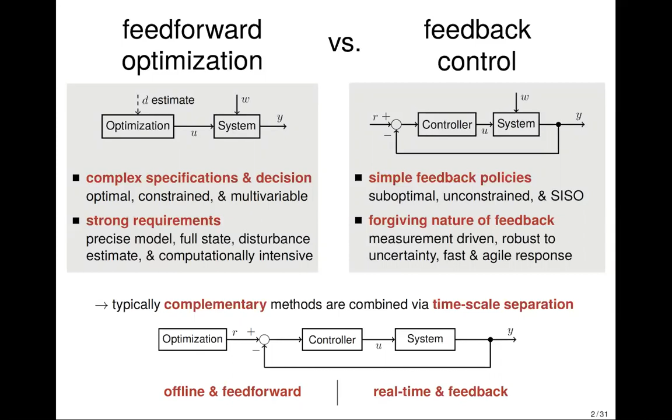Let me illustrate how this works out and some caveats on an example that I take from power systems, and I will use power system examples throughout this presentation. Namely, I use the power system balancing example. So the quintessential task for power systems is to balance load and generation. And if they're not balanced, so if there's more load than generation, what you see is an offset in the AC frequency of the system. In this case, it will be operating below the nominal 50 Hz frequency.

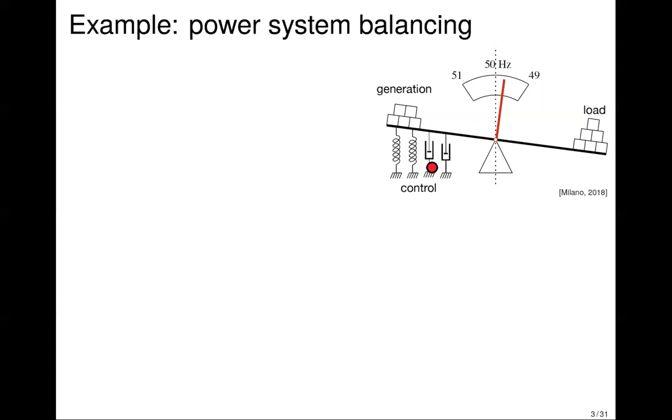The purpose of online control, indicated in this diagram by springs and dampers, is to rebalance the system based on frequency measurement. So we have these two decision layers. Offline, we dispatch generation based, of course, on prices of generation, but also based on forecasts of loads and renewables, which we don't know ahead of time. Online, we then have to mitigate any sort of uncertainty and fluctuation through feedback control, essentially some PI control based on frequency to rebalance the scale.

It turns out that in power systems, the separate offline and online decision layers are not enough. What we have to do on top of that is have a man in the middle. Essentially, we need to reschedule a set point every once in a while whenever the uncertainty was too large, our forecast errors were too large, and any sort of disturbances materialized, and the online controls cannot keep up with all of this fluctuation and uncertainty. In this case, you have to redispatch generation, activate reserve generation, or even shed load in the worst case.

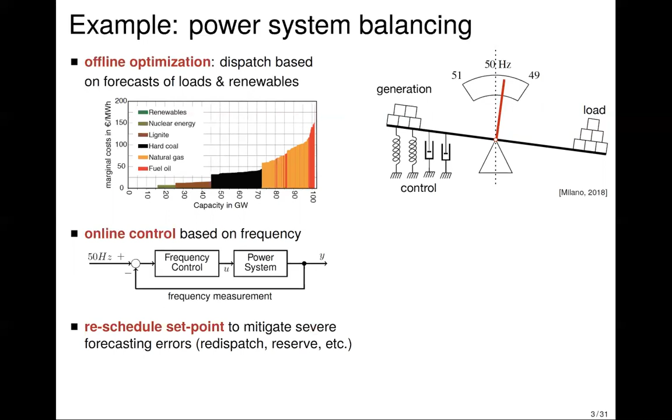As you can imagine, as we incorporate and integrate more and more renewables in the grid, we only see more uncertainty, more fluctuation, more disturbances, and thus probably more and more of these rescheduling actions. Let's take my home country, Germany, for example, where I plotted the data on how much these rescheduling actions cost in millions of euros. The costs are huge, as you can see, and they're more and more increasing as we increase renewables. Thus the conclusion we should draw is that this architecture of separating offline optimization and online feedback control becomes increasingly inefficient, and may even become infeasible as we have more and more uncertainty in generation.

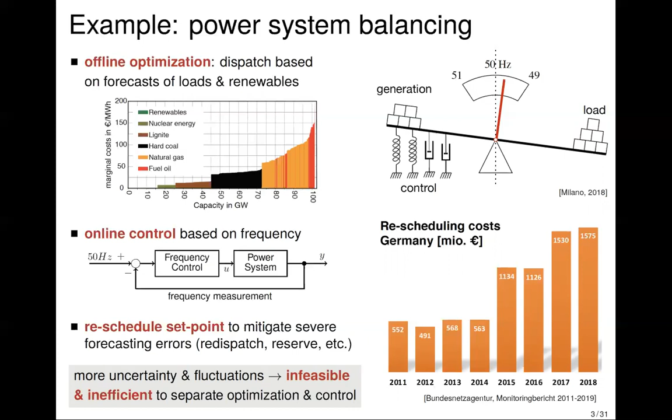This sort of conclusion can be found throughout power systems, not only for this balancing example, but also for other power system ancillary services. You typically have separate decision layers that all hit their limits under increasing uncertainty. Similar conclusions can be drawn, a similar case can be made for examples from process control systems or any sort of queuing, routing, infrastructure networks. In all of these examples, you typically have separate layers, and these layers hit their limits under increasing uncertainty and thus need some sort of cross-layer decision making.

Different architectures have been proposed in different communities. What I'd like to explore today is a particular type of block diagram, which is the following.

On the right-hand side here, you have the physical system driven by disturbances and control actions. And on the left-hand side, you have the controller.

I take now a particular controller, namely what I use is an optimization algorithm, but not a regular one. I use an open algorithm that has inputs and outputs, and online algorithms. So it's not a batch optimization, but it's recursive, can deal with streaming data. And I real-time interconnect this algorithm as a feedback control of the dynamical system.

In the simplest case, you may think about such an algorithm as just taking a gradient of an objective function that depends not only on the decision, but also on the measurements you take. So that's the open part of the algorithm. You real-time interconnect the algorithm to physics, possibly having some sort of saturation or projection effects here to take constraints into account.

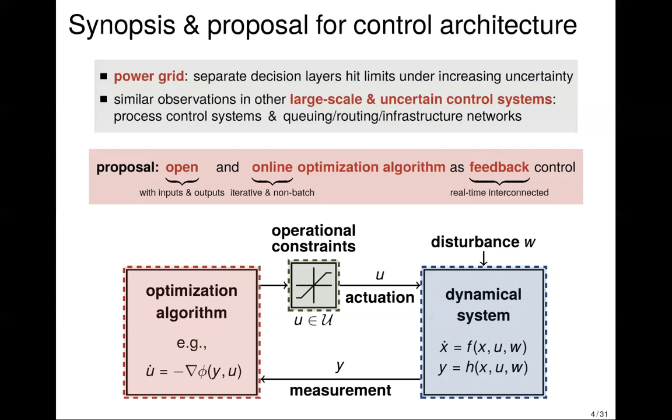Of course, this block diagram is not unique to us. There are many historical ancestors and variations of it that have been proposed. Maybe a historical root is in process control in the name of, say, self-optimizing control or modifier adaptation, where the purpose of solving sequential steady-state optimization problems was to reduce uncertainty in the system.

The block diagram directly appears in extremum seeking, with a minor difference that the algorithms that we use in extremum seeking are derivative-free, so they only rely on function evaluation, but they're hard to implement and generalize when you have high dimensions and any sort of constraints.

You can also think about what I've just shown you as a particular case of model predictive control, MPC, but of course without dynamic optimization in our case. On the other hand, we have MPC with anytime guarantees. That is, we have algorithms that we can stop at any point in time, such as real-time MPC or real-time iteration. So these are sort of conceptually related frameworks.

More closely related is the literature on communication networks, when around the turn of the millennium, people like Kelly, Low, or Srikant realized that you can inversely model the Internet Congestion Protocol, TCP/IP, as an online optimization algorithm. And then, of course, you can improve upon that using different optimization and control methods.

There's a lot of literature dating back quite some years on optimization algorithms as dynamical systems that has recently seen a revival in the context of the work by Laurent Lessard, Stephen Boyd, and Michael Jordan and their groups. And there's been also recent system theory approaches exploring this block diagram using output regulation and robust control methods.

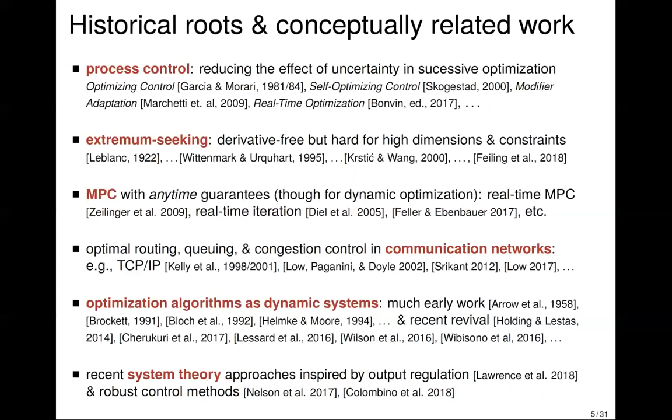Very closely related, I want to tell you today, is the literature that came from the power system community or from people that were performing control theoretic research, but inspired by power systems. Namely, the community realized very quickly that these open online optimization algorithms are great feedback controllers for power system applications. And that has sparked a whole lot of theoretic development.

Okay, so here's a recent survey by Molzahn and others. Here's my personal clustering of research groups involved in the topic. I'll let you guess the clustering criterion. An early adoption of these algorithms was due to Jokic in the name of KKT control for the purpose of power system balancing.

And around 2013, different groups in the US and Europe simultaneously started research on essentially distributed optimal integral controllers that would drive the power system to an optimal steady state. So early on, the focus has been on distributed algorithms, but rather simple models, whereas now the focus has shifted to centralized algorithms by more and more complex specification, complex methods, complex models.

These algorithms have seen different implementations in lab-scale microgrids, but also in large-scale transmission systems. For instance, a weakly related concept is transactive control.

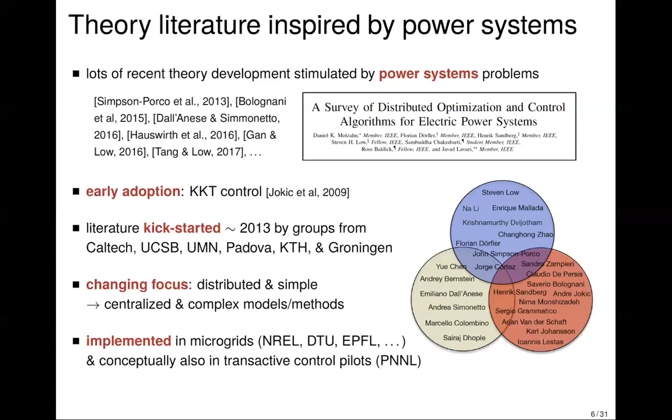So I would like to now explore this block diagram that I've just shown you today. In particular, what I'd like to understand today is, can we derive any sort of closed loop certificates, for instance, on stability or optimality? This will eventually lead us to studying projected gradient flows on manifolds. I want to discuss implementation aspects. And throughout the presentation, I will illustrate the theoretic developments with power system case studies.

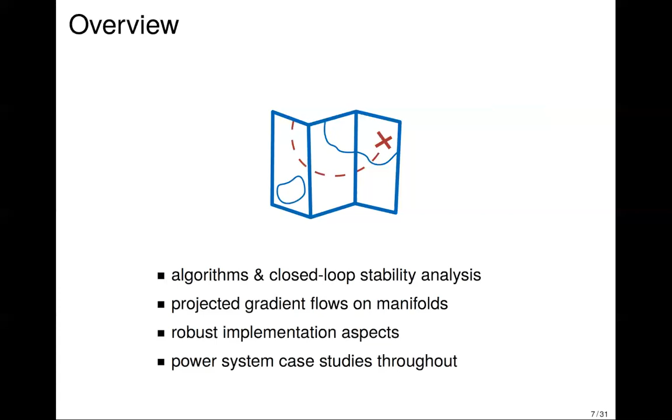Let's get started. Let's take a look at a simple algorithm and an optimization problem. So here's the optimization problem. It's an objective function phi depending on two variables, y and u, and we will later associate y and u

with the outputs and the inputs of a dynamical system. Certainly, outputs and inputs are related in steady state through the steady state map of the system. So you have y is equal to h of u for some function h.

So this constraint is explicit, and you have constraints on u. Say u is in calligraphic U, modeling, for instance, actuation constraints later on.

I'm now looking at simple algorithms to solve the optimization problem, continuous time algorithms. Why continuous time? Because I want to later interface this algorithm with continuous time physics. Of course, we have to discretize, sample-hold discretize algorithms in applications later.

The simplest continuous time algorithm is a projected gradient flow. That is, as long as you're in the interior of your feasible set, this gray region, you just follow this vector field, which is the gradient of the objective. Whenever you hit a constraint surface, you slide along tangentially and eventually get to a local optimizer down here.

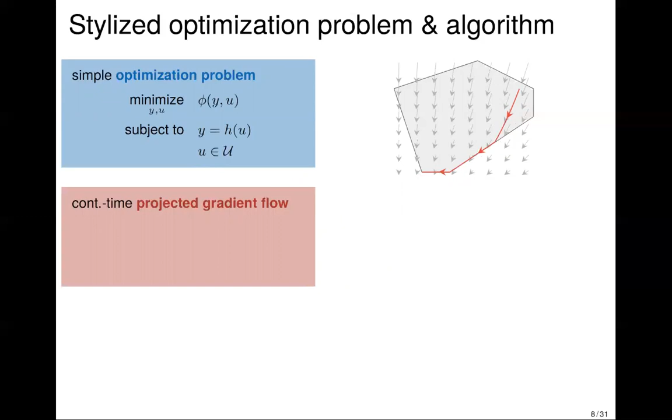So to formalize this very intuitive and simple picture, what you need is the notion of a projected dynamic system. So you don't have a differential equation x dot equals f of x, but now the vector field on the right-hand side of your differential equation is projected, and this projection pi is the following.

We look for the closest vector v to f of x within some feasible set. What's the feasible set? If you look down here, at this point it's the set of all feasible admissible directions, all directions that the vector field can take, where the solution can flow along, that will make you stay within the interior of that feasible set. So you find the closest feasible direction.

And you do this also typically with respect to a certain non-constant metric. So the ingredients here: we have some domain X in which we have to live, a vector field, a metric, and a tangent cone, which tells us the feasible directions. All of these have to be sufficiently regular for a solution to exist, and I will discuss this later on.

So now for the optimization side, what we look at is a projected gradient flow. So follow the gradient, already replaced here y by h of u, and we project on the feasible set whenever we encounter the boundary.

When you appeal to the chain rule, you can write this as dh/du, an identity, and here's the gradient of phi with respect to y and u. Then you have to do a point evaluation at y equals h of u at any point.

And you wonder, why do I write this simple gradient flow in such a complicated way? The reason being, if you replace this point evaluation by a measurement, a measurement y from a dynamic system, then now you have an open algorithm that you can interface with the system.

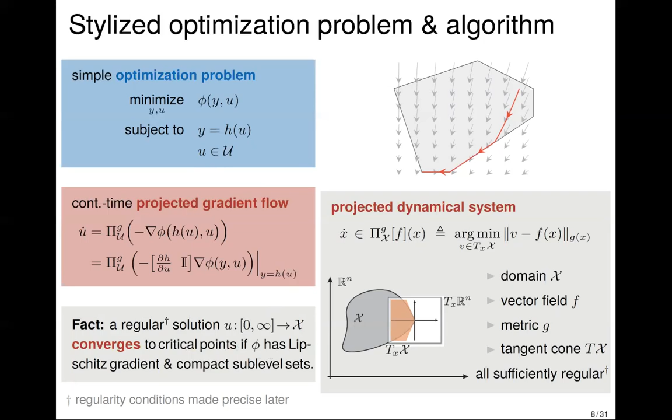Let us now interface such a projected gradient flow with the dynamic system. For now, let's stay within the simple world of LTI systems. So we have an LTI system with matrices A, B, C, and D. And we also include disturbances, Ew and Fw, on the process and the output.

Let's assume this dynamical system admits a steady state. So probably we need some stability assumption. We need the disturbance to become asymptotically constant. Then this steady state can be written as follows.

You can solve for x as minus A inverse B u and minus A inverse E w. So this will be the map His from the input to the state, and this will map from the disturbance to the state. And same for the output, where Hio will be the steady state input-output map, and the same for the disturbance.

We now want to formulate an optimization problem on the steady state of this dynamic system. So the optimization problem will be formulated on the sets of inputs and outputs that are related through the steady state map. And we have constraints U, so U has been a calligraphic U set.

Now we'll use that simple projected gradient flow to drive us to an optimizer, with the difference being now that I use an open gradient flow. That is, instead of using a point evaluation, y equals h of u, I replace this by a measurement. So here's the block diagram: I have my ABCD LTI system with disturbances, here my projected gradient flow, and now I real-time interconnect the two. I also use a scaled gradient flow, giving myself a gain epsilon, or in optimization language, a step size. The purpose of that gain is to reduce the input-output gain of this algorithm, or to enforce a timescale separation between these two systems.

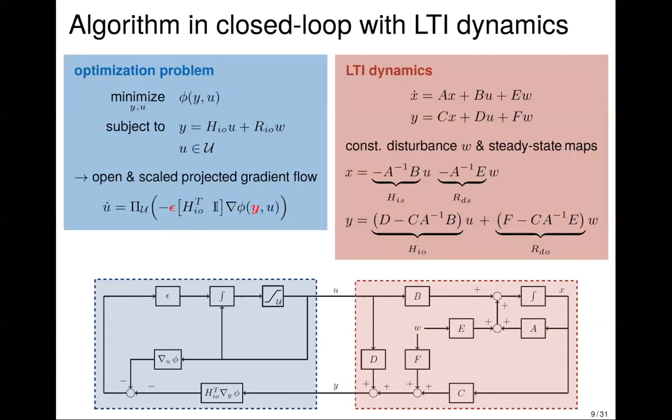We need the following assumptions. We need that the gradient flow in isolation is well posed, so we have compact sublevel sets and a Lipschitz gradient with Lipschitz constant L. We need the LTI system to be asymptotically stable with convergence rate tau, that is, there exists a Lyapunov matrix that satisfies the Lyapunov equation, P A plus A transpose P less than or equal to minus 2 tau P.

And we need a sufficient timescale separation, some sort of small gain separation between the two systems, that is, our epsilon should be small. It should be smaller than some value epsilon star, which depends on the convergence rate and input-output gains of the algorithm and the LTI system. So it's 2 times the exponential decay rate scaled by the condition number of the Lyapunov matrix.

Under these assumptions, you get that the closed loop system is not only stable, it will also globally, from any initial condition, converge to the critical points of the optimization problem while remaining feasible at all times. Because at all times you stay in the interior of the domain you optimize over, and you will converge to critical points. So it's a very powerful statement under, I would say, rather weak assumptions.

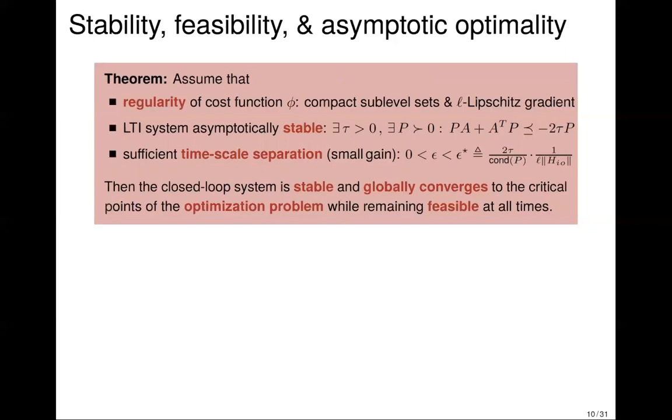And what's very nice about this, the proof is very simple and robust. Namely, for the proof, we rely on a LaSalle-Lyapunov argument proposed by Saberi and Khalil in '84, which again relies on singular perturbation theory. In particular, we use a different set of coordinates.

In singular perturbation theory, this coordinate would be called the boundary layer error coordinate. What is it? It's a difference between x and its steady state, so it's the steady state error of the state. Now we find a separable Lyapunov function in these new coordinates: here's the Lyapunov function of the LTI system in this new error coordinate, and here's the Lyapunov function of the algorithm if it was in isolation, so you replace y by h of u. And now I just take a convex combination of these two terms, so I found a separable Lyapunov function where delta is in 0,1.

Now, with some attention to details, conceptually the proof is very simple. You just check that the derivative of that function is non-increasing, which turns out to be true if epsilon is less than epsilon star, provided you've chosen a good value of delta. So the quintessence of the proof: in these new error coordinates, you can find a separable Lyapunov function which is decaying under sufficient timescale separation. It's a very simple proof, and you can already see this can be extended to much more general setups.

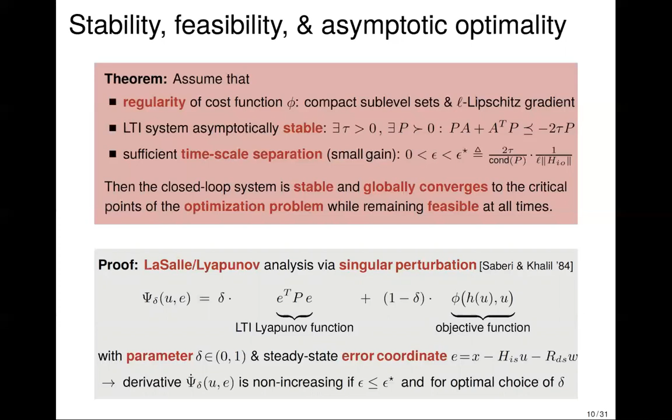Before going there, let me illustrate this theorem with an example. Appealing again to the power balance example, let's see if we can do this in an optimal way. Can we do optimal frequency control? What we can control are the generation set points of an LTI power system model. What we do not know are any sort of disturbances by loads or renewable generation. What we measure is system frequency, as well as all variables we'd like to constrain, for instance injections and line flows. The details of the power system are here, but I will not discuss them.

Essentially, we stay within the assumptions of the theorem for now, so we use LTI dynamics. Our optimization problem has an objective to minimize the cost of generation while driving the frequency to its nominal value. We incorporate our operational constraints on line flows and frequency here as soft constraints in the objective. Later on, we'll do more sophisticated things than soft constraints, but for now I'll stay within the assumptions of the theorem. We have explicit constraints on the actuation that we project on using projected gradient flow.

And of course, we have the steady state map from the input and the disturbance to the output. The control at the end is just this projected dynamical system: follow the gradient and project onto the tangent cones at the constraints.

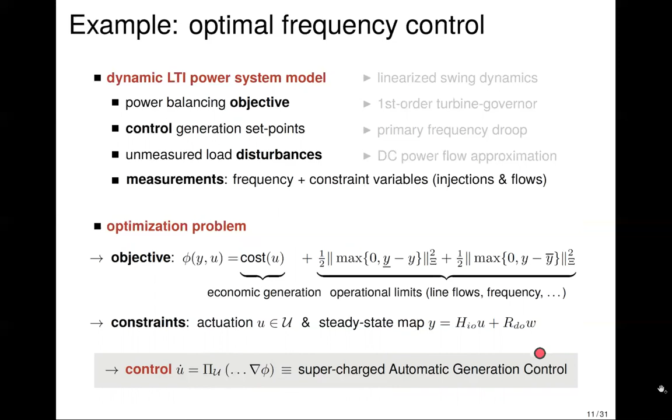So if you want, this essentially is an integral control, or a supercharged automatic generation control in power system language. What is this doing for you? Let's look at an example, the IEEE 118 system.

Initially, we are not yet at the steady state solution or optimal solution, so initially there will be a transient where we converge to this dashed line. What I show here is the generation cost, and we very quickly converge to a globally optimal solution.

That would be the ground truth optimization if we were to solve the optimization problem at every instance in time. We do so despite the system undergoing some events, some contingencies like a generator outage or a double line tripping, and frequencies will be nicely stabilized despite these disturbances, so we gracefully ride through them.

Here are the variables that we project on, so the generation set points - notice we satisfy the constraints at all times. And here are the constraints we incorporate, for instance using soft penalty method, and you see we also nicely satisfy the constraints here. Okay, so the transient curves look very nice.

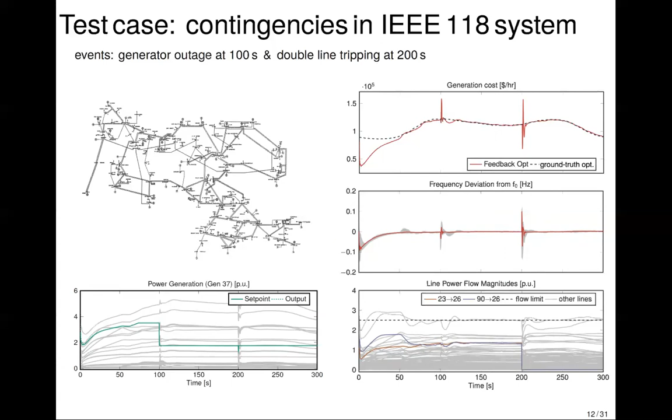Let's look at the assumption of our theorem. The main assumption was we enforce a timescale separation between our algorithm and the dynamic system, so we had epsilon less than epsilon star, and now let's ask how conservative is this assumption.

So we conclude here that our condition for this particular case study is, it's not exact, but it's also not conservative - it's within a factor 10. Of course, this conservatism depends very much on the problem, how you choose your penalty scalings, and so on.

So just a small wrap up of what did we learn from the simple example and the LTI system analysis. We don't need a whole lot of assumptions in the plant - we only need internal stability, no observability, no controllability.

We could arrive at a similar type of certificates if the plant had more structure, passivity, or some sort of primal dual structure, but in general we don't need this. We need very little model information, so we only need measurements in a steady state input-output map. In particular, we don't need the dynamic model, we don't need the state, and we don't need the disturbances.

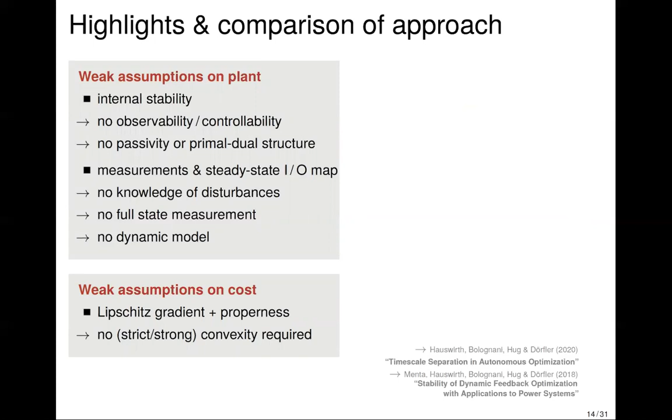Okay, we converge to optimality or local optimality no matter what. We have very weak assumptions on our optimization problem - we only need a Lipschitz gradient and compact sublevel sets. We don't need convexity. Of course, having convexity gives you global optimality, but in general it's not needed for the proof. So the problem setup is very simple, very parsimonious.

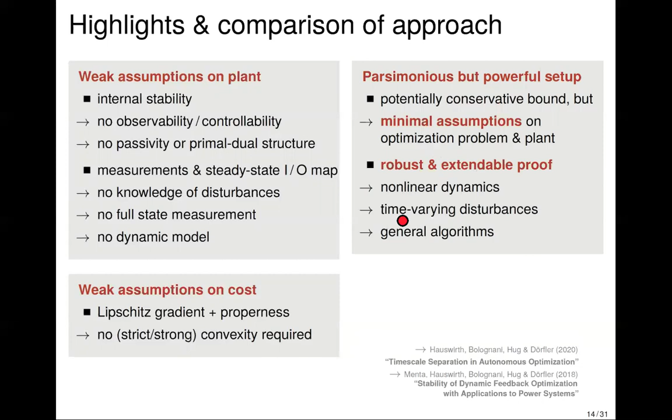Potentially you get a conservative bound, but you have minimal assumptions on the plant and on the optimization problem. And the proof is very simple and robust - that is, you can easily extend it now to your favorite class of nonlinear systems, to time-varying disturbance and more general algorithms, of course under some assumptions which I'll discuss later.

So the takeaway is that these online optimization algorithms work very well as feedback controllers. Okay, and this will be our working hypothesis for the remainder of the talk.

Let's go a little bit more general towards nonlinear systems and general algorithms. So if you have a nonlinear vector field, f of x and u, you need to assume that there's a steady state of the system, and you can apply an implicit function theorem to the steady state.

So locally, you can find a function x as a function of u, so x equal to h of u - this will be your input to state map. You need to assume that this system is incrementally asymptotically stable, incrementally with respect to this steady state error coordinate.

Okay, so your Lyapunov function will be formulated as a function of this error. In particular, your Lyapunov decay will be quadratic in this error, and your growth rate of the Lyapunov function in u will be linear in this error with some constant zeta and gamma. So this is the assumption you need on the plant, essentially incremental asymptotic stability.

On the algorithms, let's go slightly more general. Let's not use a gradient flow, but let's use a variable metric gradient flow, where I throw in front of the gradient here a matrix Q of U inverse. So this matrix is state dependent, but I assume it to be positive definite for all inputs U.

It looks very esoteric. For those who are familiar with optimization, you will recognize this as being, for instance, an instance of the Newton method.

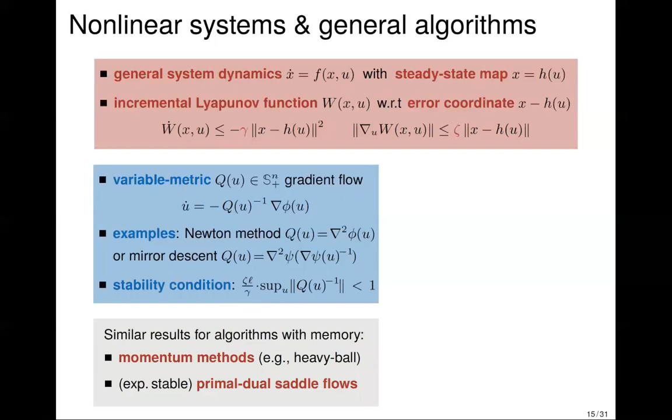You can also go to other algorithms, for instance ones with memory states, such as momentum methods like the heavy ball, or primal dual methods, as long as you can satisfy some sort of exponential stability, with your favorite combination of weighted metrics, memory states, and projections. It turns out for all of these algorithms, the proof is very much the same as in the previous LTI example, and you always arrive at such a stability condition. I want to stress that the assumptions you make are rather tight: you need a bounded metric and a bounded Lipschitz constant.

Let me illustrate some non-examples. The discontinuous subgradient flow does not have a bounded Lipschitz constant, and Nesterov acceleration does not have a bounded metric. Both of these work fine as offline algorithms applied to an algebraic plant, but when you interface them to the dynamical system, these algorithms will actually not converge, because they don't have a bounded metric or a bounded Lipschitz constant. So you cannot take any optimization algorithm — there need to be some minimal assumptions.

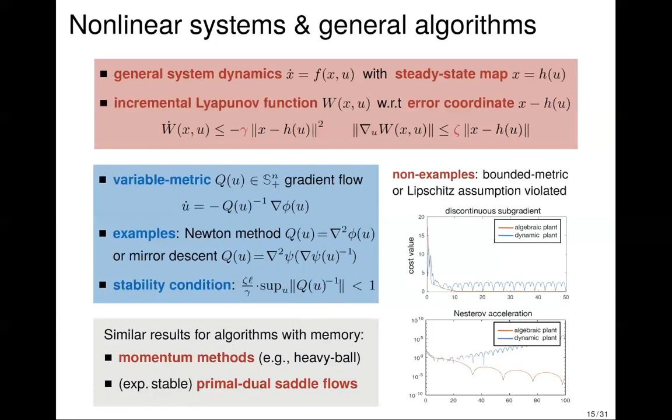Let me show you what we can do with this. I want to explore a highly nonlinear test case: understanding voltage collapse in power systems. A voltage collapse is a phenomenon where a sequence of events drives the system to a point where it undergoes a saddle node bifurcation — two equilibria merge and disappear. It's a highly nonlinear scenario.

I'm currently on sabbatical in Sweden, and I thought it's appropriate to use an example from Sweden. This voltage collapse occurred in southern Sweden in '83 — it's a famous historical event. So what I use now is an example of the Swedish system modeled in gory detail. Here are some details on the modeling, and I'd like to understand this voltage collapse and how we can mitigate it.

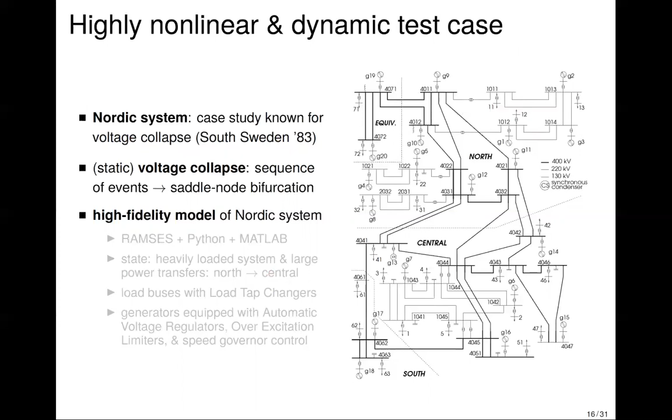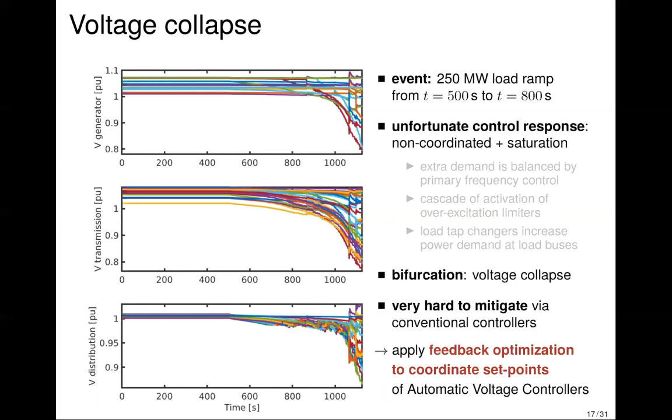So it's very hard to mitigate the saddle node bifurcation of voltage collapse via conventional power system controls. Let's see what our online optimization can do. Assume we have access to the generation set points, the set points of the automatic voltage controls of the generators, and apply feedback optimization to update these set points. The cost function we pick is related to the saddle node bifurcation — something becomes singular, some equilibria disappear. So we put here essentially a cost that makes sure something does not become singular: a particular matrix, the power flow Jacobian, should remain regular. So I put as a cost minus the log determinant of that matrix.

Let's move on. I think I've convinced you now that under sufficient timescale separation, you can apply these algorithms to a dynamical system. What really remains to be studied is how these algorithms work when we interface them with the steady state of the system. The steady state of a dynamic system, at least for a physical system, typically has some sort of smoothness properties and takes the form of a manifold. So let's understand these algorithms when they flow on manifolds, particularly the projected gradient flow.

Let me again motivate this from the viewpoint of power systems. I'll go into a bit more detail, but not beyond high school physics. We need three equations: Ohm's law, voltage is impedance times current; Kirchhoff's current law, sum of all currents is zero; and AC power, which says the product of voltage and current is power.

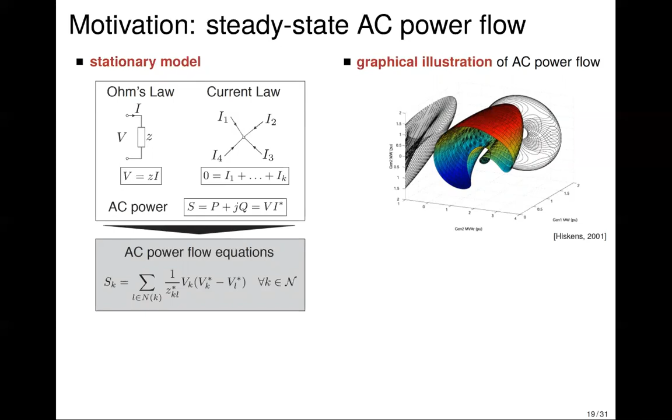On top of that, you typically have a lot of parameter uncertainty, up to 20% in these equations. And you should think of this as really only the steady state of a highly nonlinear dynamical system. So all of this makes power systems interesting.

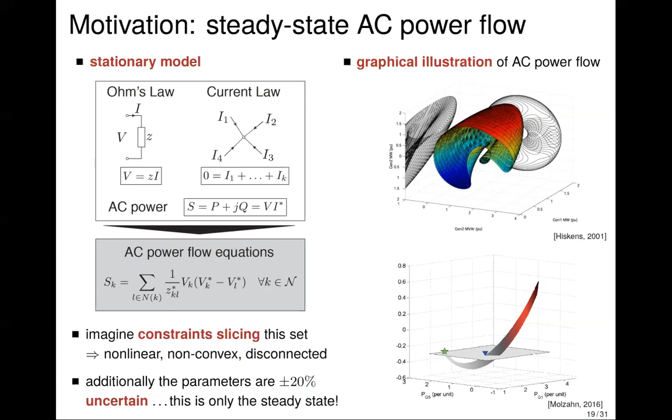So where's the manifold appearing? Some of the good news is that these power flow equations are complex, but you can formally show that they take the form of a differentiable submanifold. So it will be nice, well-posed.

You can attach local tangent planes everywhere as approximations. It turns out you can then locally invert the equations on this manifold. Also, constraint qualification conditions like LICQ will hold generically on the surface, so you have a lot of regularity. Essentially, everything will be differentiable, derivatives will be full rank, and you can take inverses, which gives you flexibility for the algorithms.

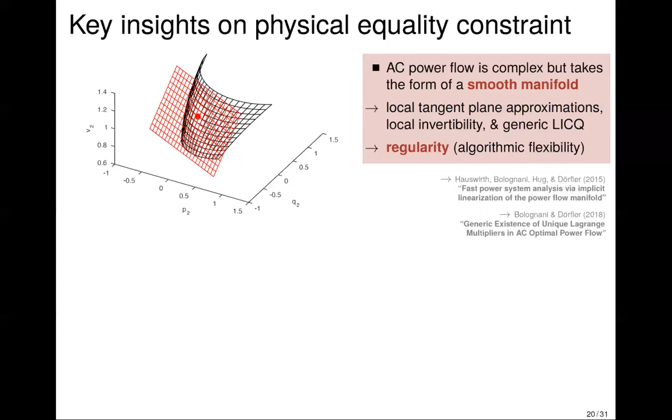Also notice that this manifold is the steady state of an ambient dynamic system, and it's a locally stable steady state. That is, the physics of a power system will eventually drive you to that manifold, so they enforce feasibility even when the algorithm performs non-exact steps, which gives you a lot of robustness in terms of the algorithm, but also when applied in closed loop.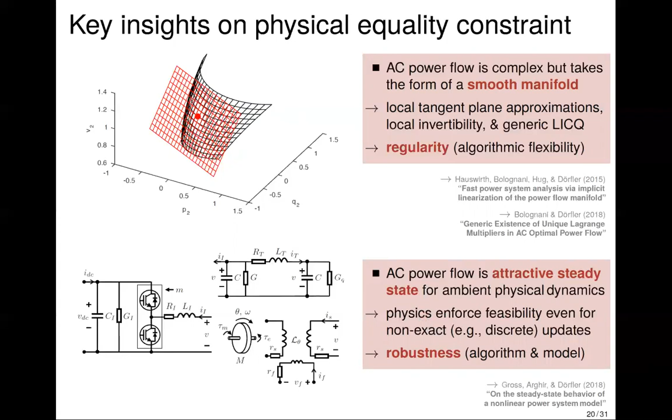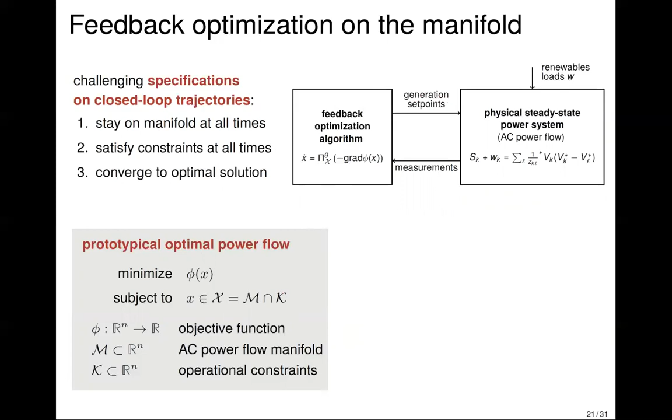So let me draw again a picture from another low-dimensional example. Power system scientists will recognize this as a projection of the so-called nose curve, a curve in the power-voltage domain. Here you see this power flow manifold, this orange surface. We slice it with constraints on generation and voltages.

And what our algorithm has to do is slide along the surface to a constrained optimizer. That is, we have to stay on the manifold at all times, so we need to project our descent direction onto the tangent plane. Wherever we go, we also have to remain feasible, so we project inside the feasible cone using the projected dynamic systems framework. And finally, this has to be a descent direction, so we converge to a local optimizer, or possibly even to a global optimizer.

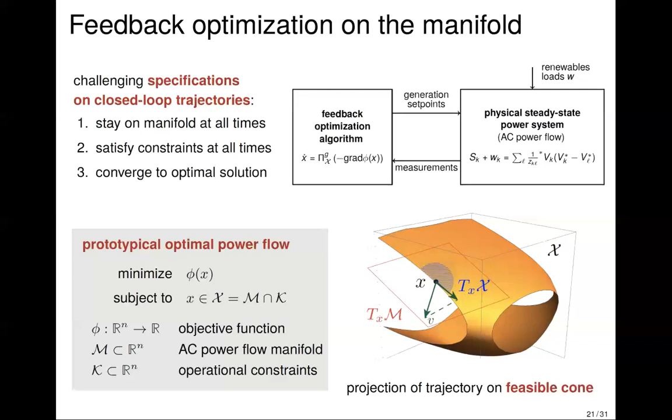Now you wonder, well, all nice and fine, but people work on power systems without all of these specifications. Often they just linearize things. Is this level of generality really needed? Is this just technical sophistication? Let's look at some simple low-dimensional case studies.

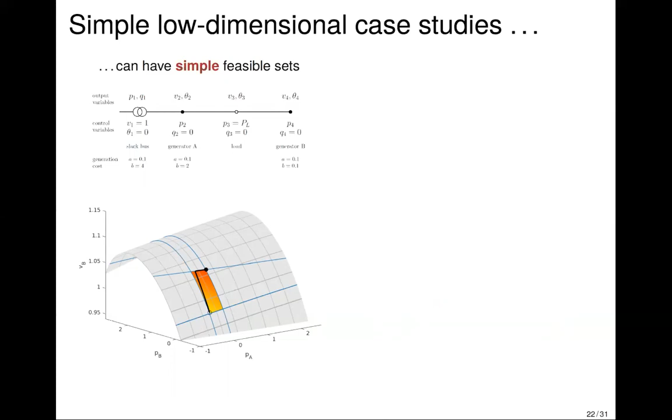For this simple system, that would be the power flow manifold. This is the feasible set within the constraints. So you start from here, the algorithm drives you to the constraint, you slide along, you get to the global optimizer. Yes, it is a nonlinear manifold, but it doesn't look as dramatic as the previous picture. Presumably linearization works well here. Fine, that's granted.

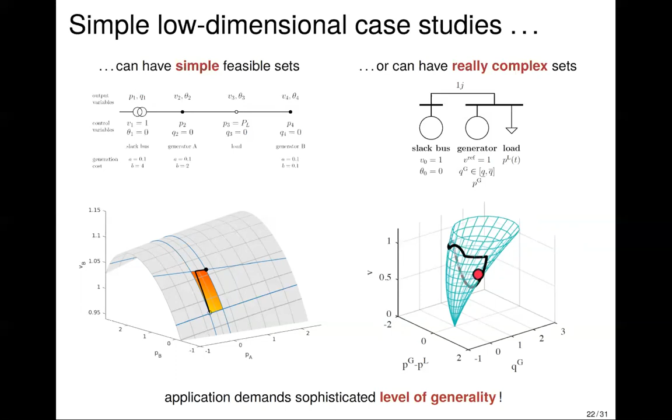Here's another even simpler case study, only 3 buses. Here's the manifold again, in particular the projection. And this black line would be the feasible set in that projection, and it looks definitely very nonlinear, non-convex, and even non-smooth. So the takeaway is that the application, even for simple case studies, demands a rather sophisticated level of generality. So let us understand when a projected gradient flow on such highly irregular domains will actually converge to an optimal, locally optimal solution.

What we have to study is a projected dynamical system, where we have the gradient of an objective, and we project onto the tangent of the constraints with respect to some metric. And what we'd like to understand is, does this converge or not? And what does it converge to?

It turns out when you have a solution to these equations, and if your objective function has compact sub-level sets on the feasible set X, then X of t will converge to the set of critical points of your cost function on X. So essentially, under almost no assumption, this will converge.

The devil's in the details, namely assume you have a solution, particularly a Caratheodory solution, an absolutely continuous function that satisfies this differential equation almost everywhere. The solution exists for all time, and it's viable, within the feasible set, and you have an equality sign, so there's some notion of uniqueness. So we have to understand when this is the case.

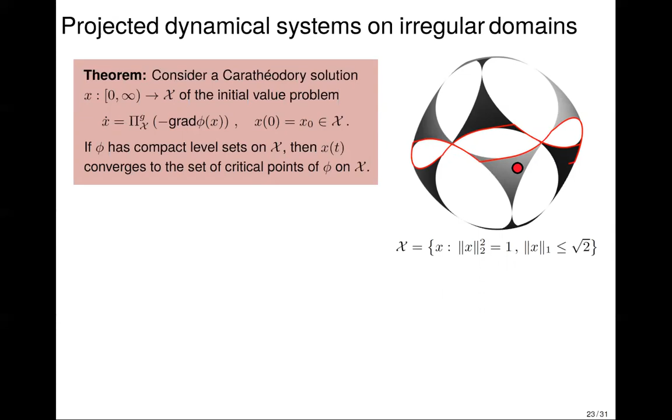Before that, let me show an example. Here the manifold is the ball, so x squared equals 1, and we slice the ball with a diamond, and we have here a flow on the set where we project whenever we hit a constraint, and we can actually certify this flow will converge nicely. This is fairly non-trivial.

So the devil's in the details, namely we assume we have a solution. The hidden assumption is, when does the solution exist? When is it unique? When is it viable? When is it complete? When you don't have Euclidean space, you don't have convexity, you don't have standard metrics, and so on. That's where a lot of our work goes, and we have to dig a little deeper to find the regularity assumptions for when this is the case.

For instance, we have existence of such a Caratheodory solution, provided our constraint set is Clarke regular, so we don't have any inward cusps. The vector field is continuous, the metric is continuous, the manifold is differentiable. And uniqueness we get essentially when the vector field is Lipschitz, the metric is Lipschitz, the manifold is Lipschitz differentiable, and the constraint set is proximally regular, that is, it admits locally unique projections.

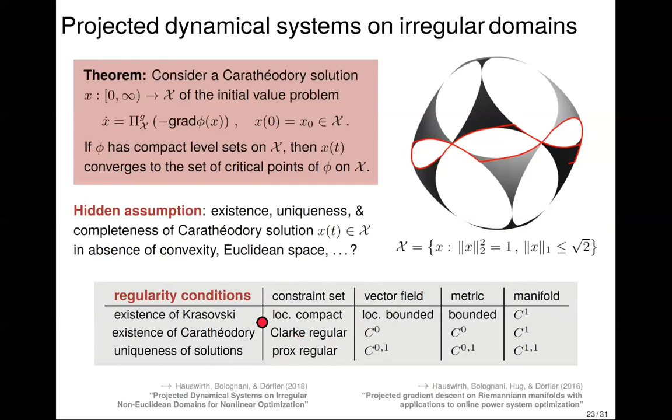It turns out for the typical power system optimization problem, this will always be the case, essentially thanks to the nature of the manifold, which certifies that you will have full rank Jacobians. But you can, of course, construct examples where it is not the case, and you can find out that these sort of assumptions are minimal. That is, you can construct counterexamples whenever you remove any of these assumptions.

So you understand you have to do some deep math, or deeper math, going into variational geometry to understand these projected dynamical systems. But then you also want to implement those.

And when you implement them, you have to take other effects into account. In particular, the first thing we realize is if you want to implement a projected dynamical system as a feedback control, two ingredients will be a projection integrator, which is a recipe for wind-up, bang-bang type behavior. So to remedy that, you probably need an anti-windup approximation that robustifies you.

For instance, if your feedback control is of the form k, a function of x and u, and you want to project this vector field, u dot equals k, a robust way to do this is to do a pointwise projection on the output, compare this pointwise projection to u, and feed this back negatively with a high gain. So this is essentially an anti-windup approximation.

What's nice is that this saturation often comes for free by the physics of the plant. You can actually formally show—Adrian did this during a sort of mini sabbatical in Santa Barbara—that this type of robust anti-windup approximation converges, in the sense of graphical convergence, to your projected dynamical system.

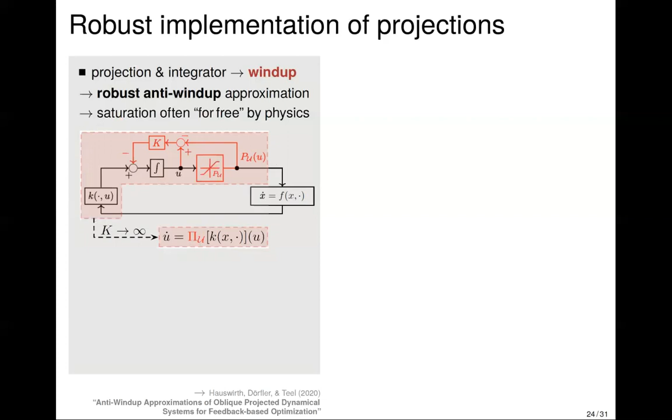So this is how we would implement this robustly. You'll also be subject to disturbances, not only smooth and continuous ones, but disturbances that may change your domain. So your x of t, where you project on, will be time varying. You have to understand what the temporal tangent cone to project on is, when all of this is well posed, and how to derive tracking certificates—under what kind of changes. For instance, if the change of the domain is Lipschitz continuous, will you still track an optimal solution, and with what error?

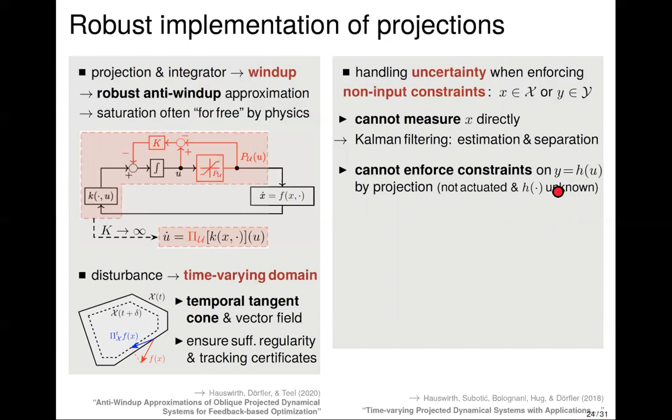Further on the topic of uncertainty: when you have input constraints, you can robustly deal with them using this anti-windup approximation projection. But what about non-input constraints, when you have constraints in the state or output of the system? For state constraints, clearly we cannot measure the state directly, so we have to estimate it with, for instance, a Kalman filter, and under some assumptions you can derive a separation principle between the algorithm, the system, and the Kalman filter. What about enforcing output constraints? You cannot enforce them by projection or anti-windup projection because this is not an actuated variable—so that cannot be done. Also, you can measure the output, but typically you don't have the functional form of how y relates to h of u, which is uncertain and subject to disturbances.

The way people deal with that normally in feedback optimization is to either incorporate the constraints as a soft penalty or to dualize them and use an appropriate gradient or saddle flow. This sort of works okay-ish, but it's a little hackish and inaccurate—at best you get asymptotic feasibility, and typically need strong assumptions for this to even be well posed.

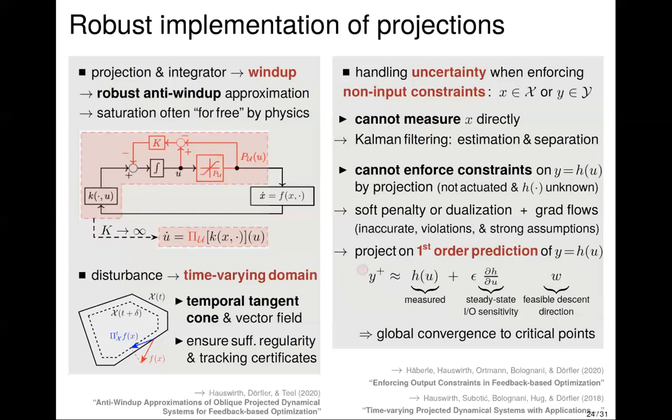What we found works better is an SQP-style method, where you approximate your output map, y equals h of u, by a first order prediction—so y equals the measured variable, and then of course you move using a gradient descent map. You approximate where you'll go using a first order approximation, which requires knowing the sensitivity dH/du, which you need anyways for your projected gradient feedback. Then you have a feasible descent direction, and when you search for it, you project onto this approximated constraint. You can certify that this will also get you globally to the set of critical points of the optimization problem, even without convexity, linearity, and so on.

Let's see how all of this works out in a non-trivial example. Here's another power system, where everything is now time varying with a lot of disturbances. This is the net profile of aggregated load and renewable generation, solar and wind, which is quite time varying and even discontinuous at points where a load is turned on or off.

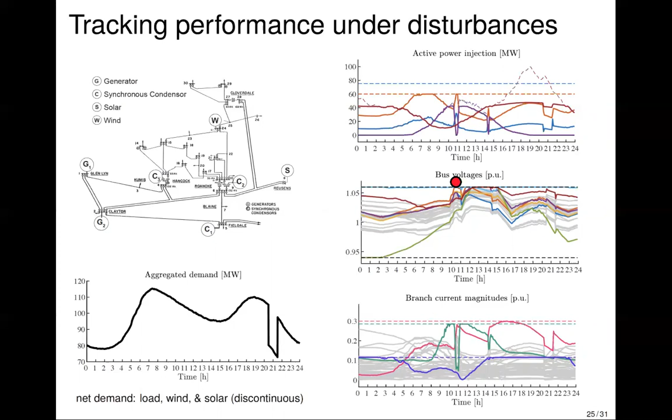The algorithm we run is a projected gradient flow feedback control, subject to all the modifications shown on the previous slide. Looking at the transient curves, all the variables of interest stay nicely within the constraints—you satisfy constraints at all times, and some of these constraints are even time varying. For instance, the purple curve is solar generation, which varies throughout the day. You see you don't use all of the solar power—you actually curtail it, because otherwise you would violate voltage constraints.

So the takeaway is that you have transient trajectory feasibility despite disturbance uncertainty. If you compare the solution to the ground truth optimizer, which is omniscient and has no computational delay, you see it nicely tracks the ground truth optimal solution, despite the discontinuous nature of loads and renewables—it works out very nicely, you track ground truth. Moreover, this is very robust to model mismatch: if you perturb your model quite severely, say perturbing the loads by 40%, your algorithm doesn't know that, but it will still be feasible.

You will actually converge to global optimality, despite having a severe mismatch in parameters here. If you think back, you can think about load perturbation as an additive affine disturbance. And we proved before for the LTI case that you don't need to know the affine disturbances, right? So maybe it's not surprising to get to optimality here.

You can also throw in more severe disturbance if you want, so multiplicative disturbance, where you don't know the line parameters. If line failures occur, you'll still always be feasible and get very close to optimality. In comparison, an offline optimization method, which in this case was not aware of any of the model uncertainty, would get nowhere close to optimality and would most likely not even be feasible.

And so we get all of this robustness essentially due to feedback, due to the forgiving nature of feedback. So we conclude that these rather simple algorithms perform extremely well and are very robust.

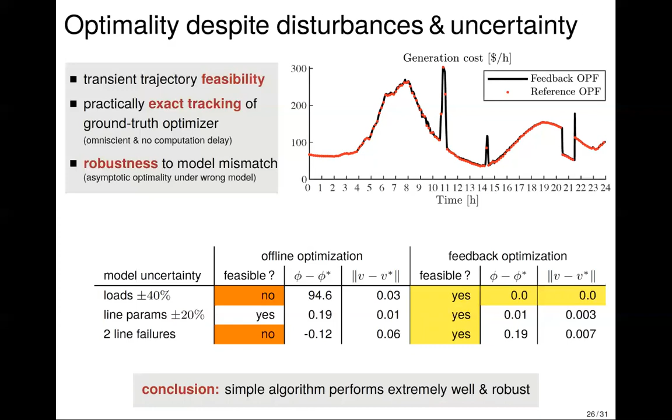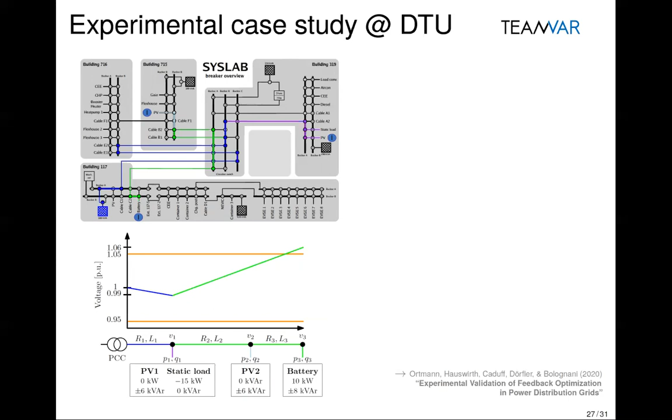Before concluding, I just want to show you some experiments when we apply this to a real system. So we ran some experiments at a microgrid at DTU where we can build our favorite type of power system. The details for now are not so important. Let me jump over details due to time constraints.

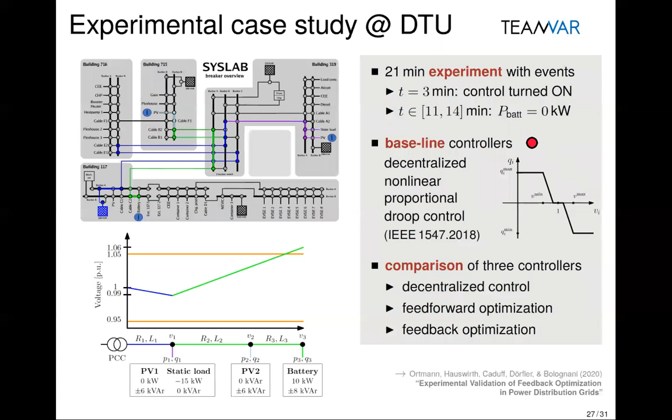Essentially, there are some baseline controls which take the form of linear or piecewise linear feedback controls to deal with saturation effects. We now want to compare what happens with the baseline decentralized controls, the feed-forward optimization, and the feedback optimization.

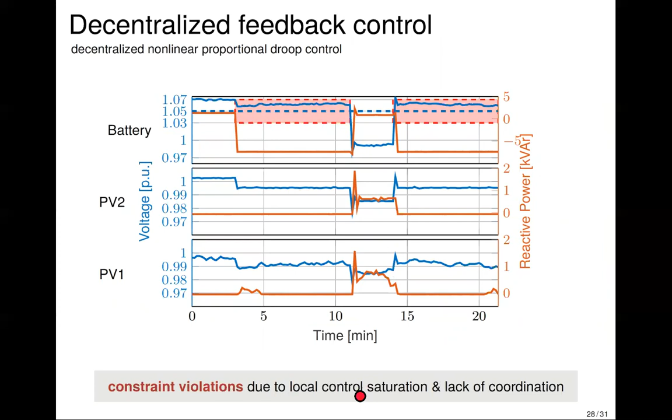We see for the decentralized feedback control that once we turn the controller on, it is not able to make sure that the voltages stay within constraints. Why? The battery reacts as good as it can, but it reaches saturation and is not able to stabilize this signal into the feasible set. The reason essentially is we have local control saturation and the controllers are not coordinated, so we need some sort of coordination to avoid this effect.

If we use successive feed-forward optimization, which would have access to a centralized model, omniscient, and is successively updated at a high sampling rate, you can make these curves jump very quickly from one set point to another, but it turns out you still have a steady state mismatch. The reason is that you still have parameter uncertainty. Even in this microgrid where you know everything, you have enough model uncertainty to not end up in the feasible set. And this is what feedback is good for.

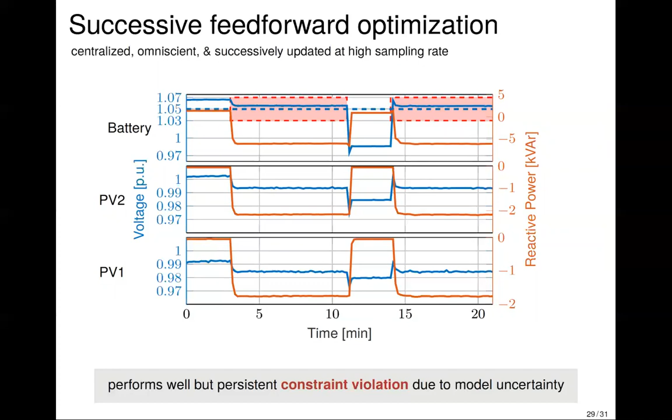Let's run our feedback optimization in real time. And you see you very nicely make sure all the variables go within the feasible set. Despite the battery being saturated, you stay within the feasible domain. I should say we used a very low sampling rate, so every 10 seconds we essentially take a gradient step, and nevertheless this nicely converges. So we have excellent performance.

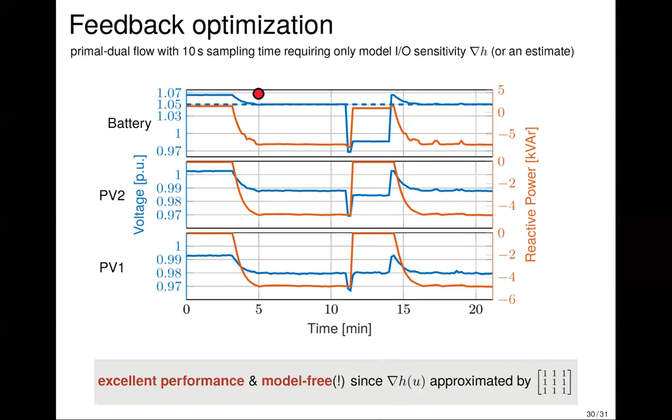Notice to implement these controllers, the only piece of model information we need is the input-output sensitivity, so gradient h of u. It turns out here we only used an estimate, namely we knew by physics that the gradient h of u is a non-negative matrix, of course depending on a lot of parameters and states, but we just approximated it by the matrix of all ones, and nevertheless it would work out very nicely. So in this case, even a completely model-free method works.

Let me jump to the end. In conclusion, what I hope to convince you of is that we can use these online optimization algorithms as feedback controllers. Our approach relied on projected dynamical systems and timescale separation. I showed you a unified framework that encompasses a broad class of systems, algorithms, and programs, and I used case studies to illustrate all of the developments.

As part of our ongoing work, we want to understand more in detail some robustness issues, performance, what happens when you throw in stochasticity into the system, so analysis questions. On the algorithmic side, we'll be interested in gradient-free algorithms, estimating sensitivity online, and seeing when we can distribute these algorithms or solve them robustly. For the power case study, we see that these algorithms work very well, but I think we need more experiments and case studies to really test when they break down and further refine them.

Finally, I think there are further applications beyond power systems and communication networks where these types of feedback optimization algorithms would be really useful, essentially whenever you have highly uncertain and constrained plants where you seek optimality. For me, a personal takeaway is that these methods work really well, surprisingly well, maybe much better than they should, and we still need to fully grasp why.